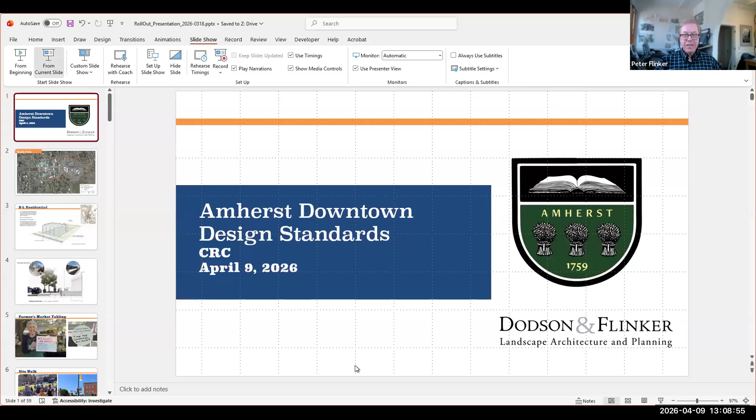Good afternoon, everyone. It's great to be here, finally able to present the final draft of some of these ideas for your consideration.

We're going to do a quick overview of the process we went through, then present the three different elements of the design standards. As you probably know, there are currently design review standards from some decades ago that support the work of the Design Review Board jurisdiction, and the outline in blue is the core of the area we're working with, but it was expanded to include some of the logical adjoining blocks.

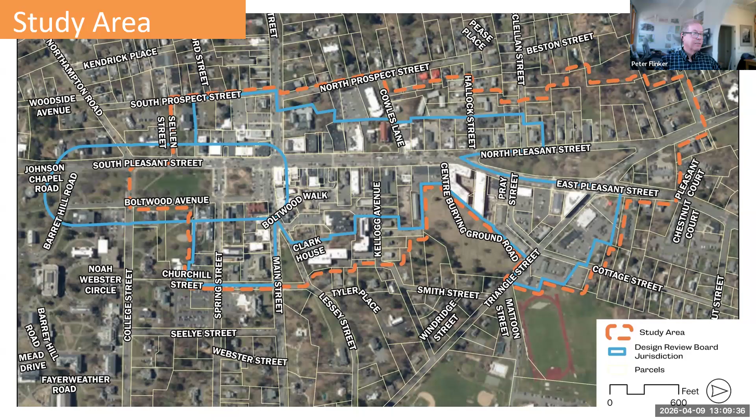Among the things we did was look at the implications of the current zoning for future development. We carefully mapped out how much you could build on each lot and what it might look like.

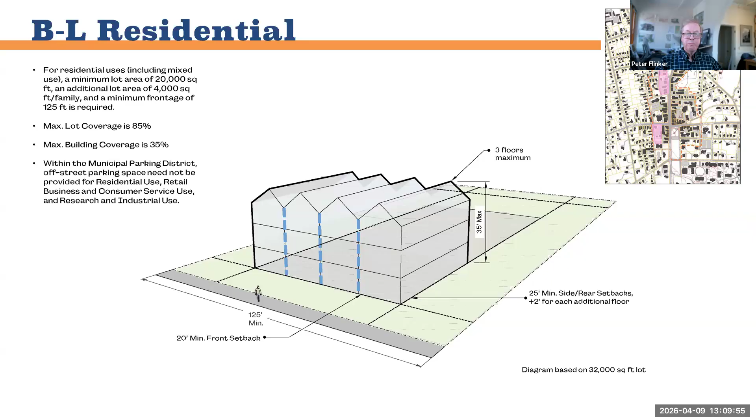We also did measured cross sections and other inventory work on the main street, because part of this project was to look at both the private realm of the private lots adjacent to North Pleasant Street and the other streets, and also the public realm, with a focus on updating the streetscape design standards. So part of that was looking carefully at how the streets, sidewalks, planters, ramps and so on are working now in different areas. What we discovered, spoiler alert, is that there's a lot of diversity, so part of the final recommendations is to simplify and unify the standards throughout the downtown.

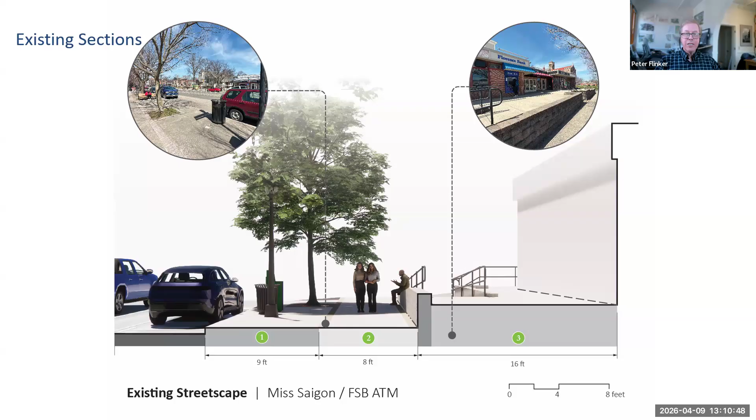We also did a fair amount of public outreach, including field outreach at the farmers market, where we heard from individuals about their vision for downtown Amherst. We also had some public workshops.

We started with a site walk on a beautiful late summer day, walking up and down different blocks, talking about what works and what doesn't work in the downtown. We always find it's really good to start by listening to people's concerns about the place where they live and work. That continued with an evening workshop, focusing again on what works and what doesn't work, what needs to be preserved and what needs perhaps to be changed.

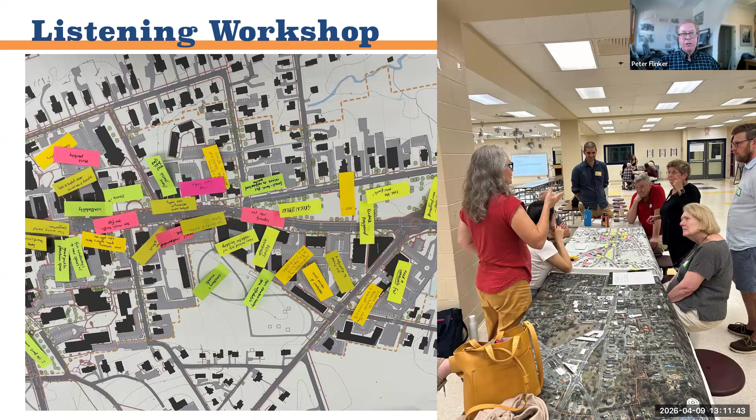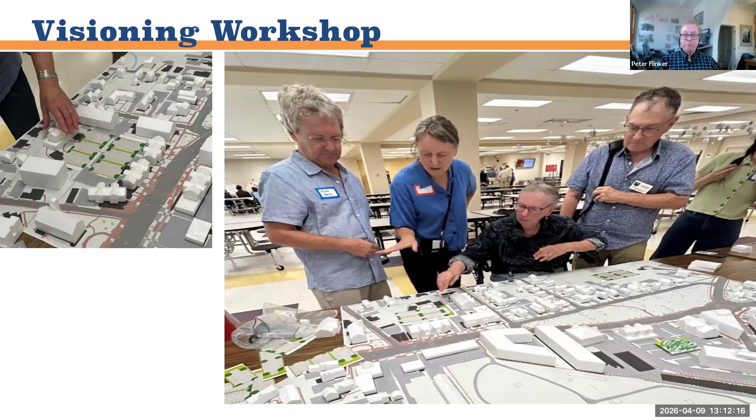That was followed the next day by a visioning workshop, where we brought a big model of the core areas of downtown and let people manipulate buildings to experiment with what would happen if you fill in some of the gaps along the street, some of the parking lots, with new buildings that could bring more continuous activity to the street. Then what would be the implications for parking? Where would you put the parking? How would you get around downtown? We found that was really helpful as we moved forward.

We did a so-called visual preference survey, basically asking people to look at photographs and comment on whether they thought this was a good fit for downtown Amherst or not. We had 377 responses to the survey about building design and 252 responses for design of streetscapes.

Based on this, we tried to distill some of the principles behind what people like and don't like in the downtown.

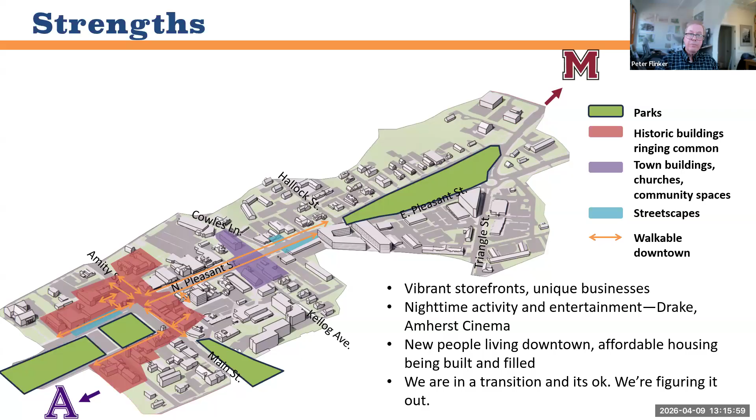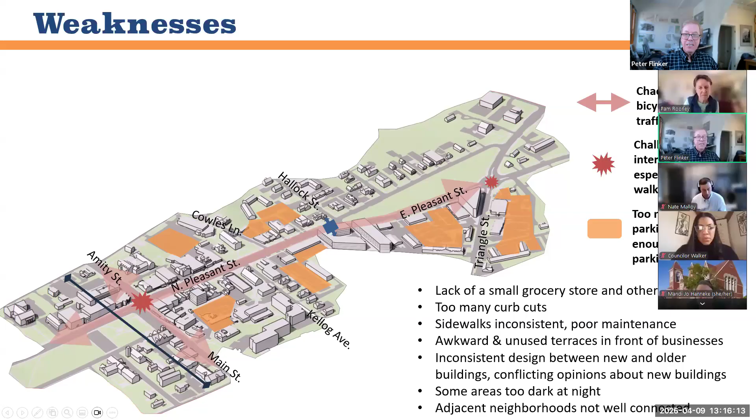Next one. Some of the weaknesses: empty spaces that are filled with cars in many cases. People realize they need parking and want it nearby, but nobody wants to look at it. Some people pointed out that the North Pleasant Street corridor is kind of chaotic, particularly on a bicycle—a lot of traffic, not very wide, and there's a lot going on. There are challenging intersections, especially for people walking and biking. People also pointed out the lack of a grocery store, the lack of consistency in the streetscape, perhaps too many curb cuts, awkward and unused terraces in front of businesses, and inconsistency between newer and older buildings. And some areas are too dark, and the adjacent neighborhoods are not necessarily well connected.

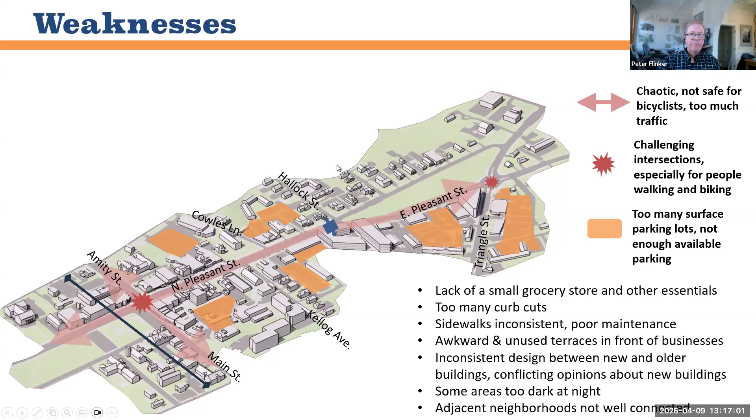Next slide. Some of the opportunities are really focused on taking some of those empty parking lot spaces and some of the less historic buildings and finding opportunities to create more places for people to live and work, to improve the functionality of the parking and have better outdoor spaces. And then, along North Pleasant Street, to create more room for pedestrians and bicyclists.

That said, our recommendations really focus on the design of the sidewalk space between the curb and the buildings. We did not address the design of the street itself, so we're not going to talk about on-street parking or bike lanes, and we didn't have any real recommendations for that as part of our concluding report.

Just to jump in here, the reason for that is because when you get into designing the street, it's a more complicated engineering process that was basically beyond the scope of the project. If you want to talk about bike lanes, especially ones that might be grade-separated at the level of a sidewalk, you might get into moving curbs and drainage, and it quickly becomes a very complicated process. So we focused on the space between the existing curbs and the front of the buildings for the public realm design.

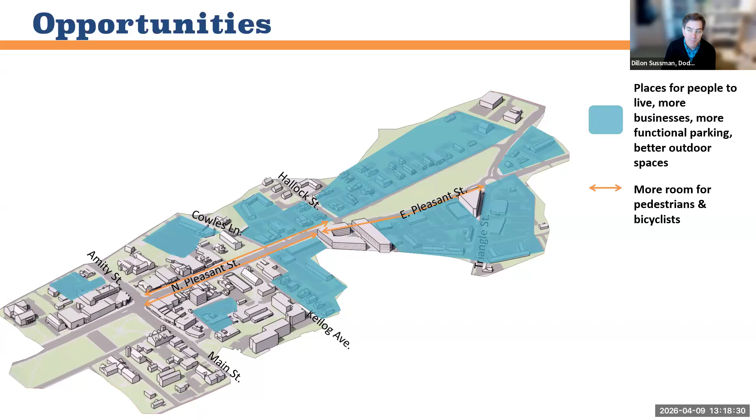And then a lot of the project's focus was on the existing and future character of downtown Amherst. The current guidelines and zoning say, essentially, when you're building a new building, make it fit into the context of what's around it. What we discovered is that there are many contexts in terms of design in downtown Amherst, from the historic center around the Common to contemporary buildings in the North End, and pretty much everything you can imagine in between. So, next slide please.

This led to some diagrams really showing how that works. We have a solid traditional area in the lower left around the Common. In the north, a very modern block between East Pleasant Street and Triangle Street. A cozy residential block on the west side of Kendrick Park. And in between, a mix of funky, mixed retail commercial area, and something we call the Hinge, which is the space where the churches and the post office create literally a hinge between the historic downtown and the northern end of the downtown.

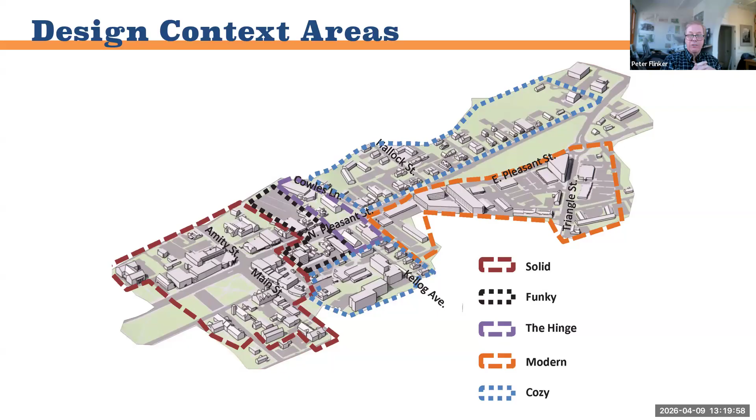This became the basis of how we're shaping the guidelines, so it was carried forth into what we're calling character zones. Again, the lower left is the downtown traditional Main Street area, which is the historic core surrounding the Common.

What we're calling the downtown village, in purple, is a transitional scale between the larger buildings in the core and the more residential blocks around it. Then what we call the downtown modern Main Street, which is the block between East Pleasant Street and Triangle Street, has the newer contemporary buildings but has really been in transition since after World War II.

It was a lot of automobile-related uses ever since that time, and now is becoming something else again. Finally, the downtown neighborhood, in green, are these less dense blocks west of Kendrick Park and on the outskirts of the other blocks, with a mix of uses but generally more green space. Part of that is because there's some wetlands in the back. There's also large, deep lots where the front is developed and the back is vacant.

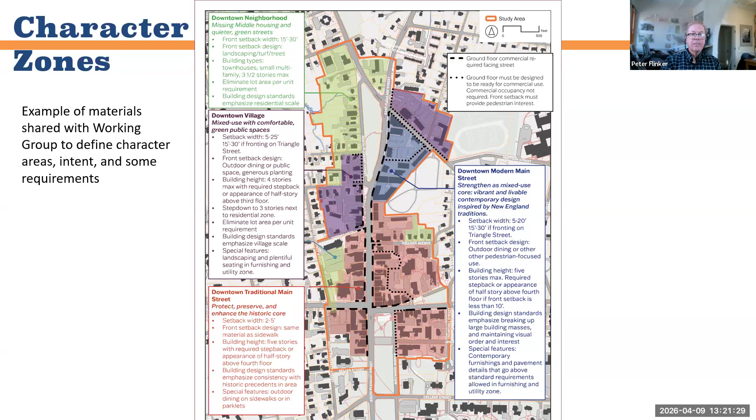We developed the design standards in three volumes. The first is the overall context and vision. The second is the design standards for private development. And the third is design standards for the public realm.

We wanted to start with the vision, because what we often find doing design standards is that even with very specific standards for individual elements like building design or tree plantings, it's very hard for people to review development effectively if you don't know what you want. Having a clear vision that's stated develops the principles behind the design standards and gives you a touchstone.

So when someone comes forward with a building and you say, we really want a wide sidewalk in front of this building, and they say they don't want to do that, you can refer to the vision as well as the standards themselves. It's not just that we want a 10-foot sidewalk, but that we want it because we're trying to achieve this vision for our downtown.

So we'll talk about how that's set up within these three volumes. The first includes the existing conditions analysis and then a vision for each of the sub-areas within the downtown. This can be used to guide applicants during the design process, and it can also be used by boards during discretionary reviews, especially the design review board, whose standards are largely about fitting into the context.

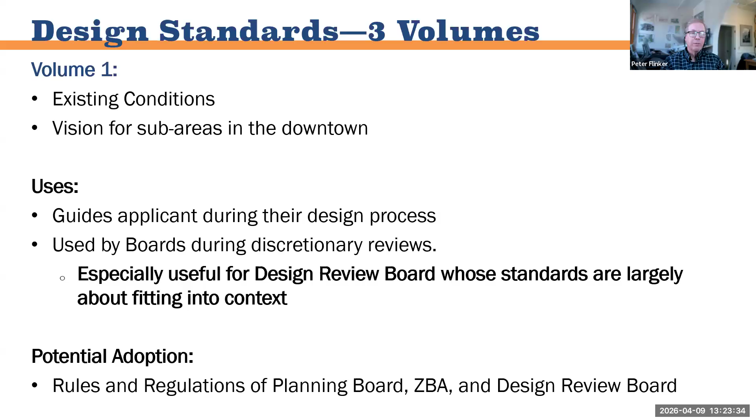So the vision describes what that context is meant to be in the future, and it potentially could be adopted as the rules and regulations of the planning board, the ZBA, and the design review board. Next is volume 2, the design standards for the private lots.

This includes zoning dimensions and use standards, building design standards, sign and lighting standards. It's meant to provide more objective information that can guide applicants during their design process and then be used by the planning board and ZBA during the site plan and special permit review, as well as by the design review board.

It potentially can be adopted. Some parts will need to be adopted into the zoning to bring it in alignment with the vision. Others could be adopted into zoning or the rules and regulations of the planning board and the ZBA, and could be adopted by the design review board. So the first volume is basically here's where we're trying to go. The second volume is meant to be more of a checklist of specific standards for different elements that people can check off, have you done this?

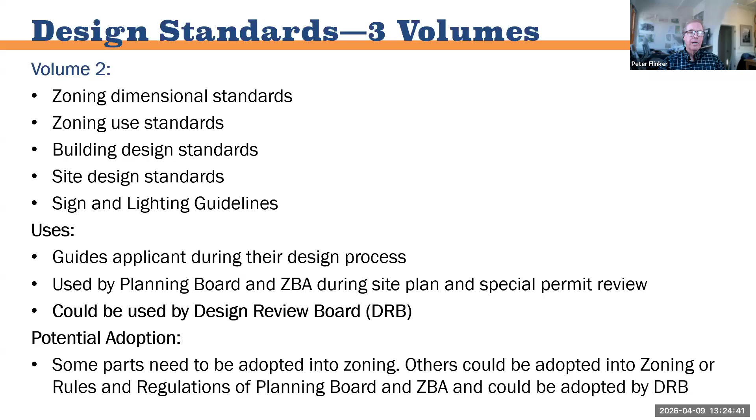Yes or no. Then the third volume is really focused on the public realm—as Dillon said, the design of the space between the front of the buildings and the curb, including sidewalks, street trees, furnishings and so on. It will probably be used most directly by the DPW when making improvements downtown, but also can be applied to development projects digging up that space. It could potentially be adopted by the DPW and or by the town council.

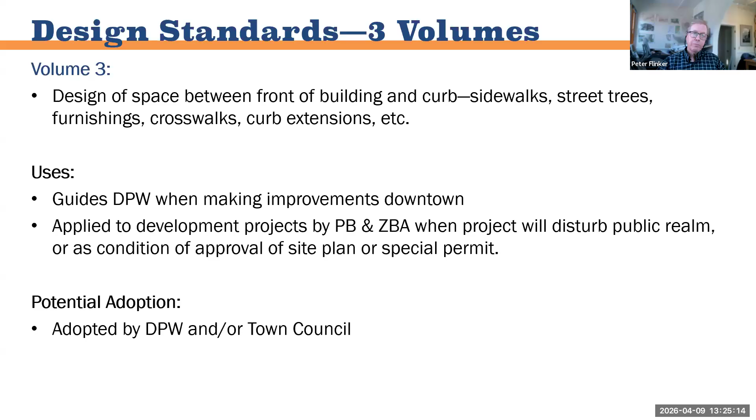So I'm going to talk about the first volume, and then Dillon will review volumes 2 and 3.

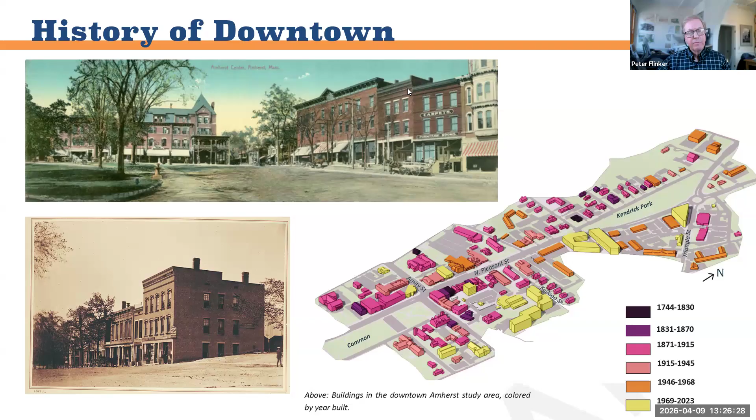We looked at the pattern of development in the private realm, including existing massing and fenestration—how buildings are designed currently downtown and what elements they share, like windows lined up in rows and columns. We looked at the way buildings enclose the space along the street: what are the setbacks, how tall are the buildings, and what does that result in for the experience of the street?

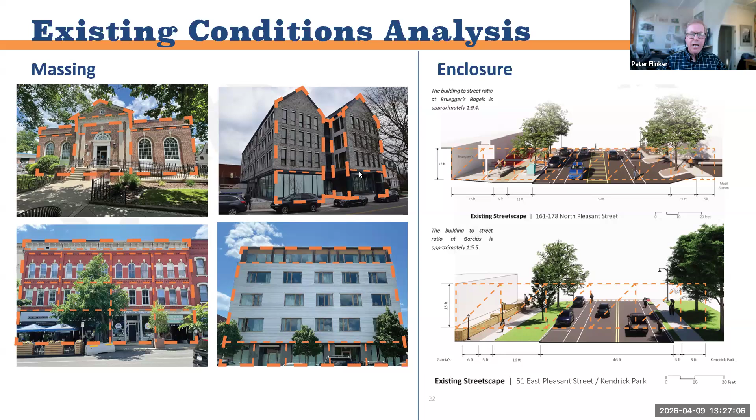Next slide. This is the existing zoning map. Part of this is thinking about how zoning will have to change. Currently there are three existing zones—we're very conscious that a lot of discussion went into the current zoning. But the big picture is a core mixed-use district along North Pleasant Street, with districts of somewhat less density surrounding that to create a transition between the activity on North Pleasant Street and the surrounding neighborhoods. That was a theme throughout all our discussions with the working group and the public, and it's part of our recommendation to continue that pattern.

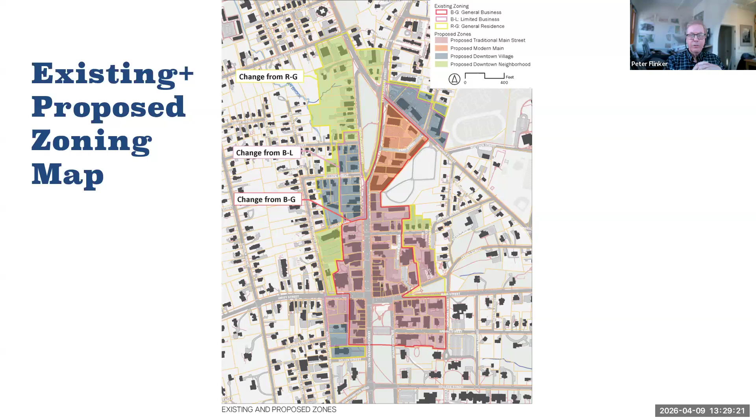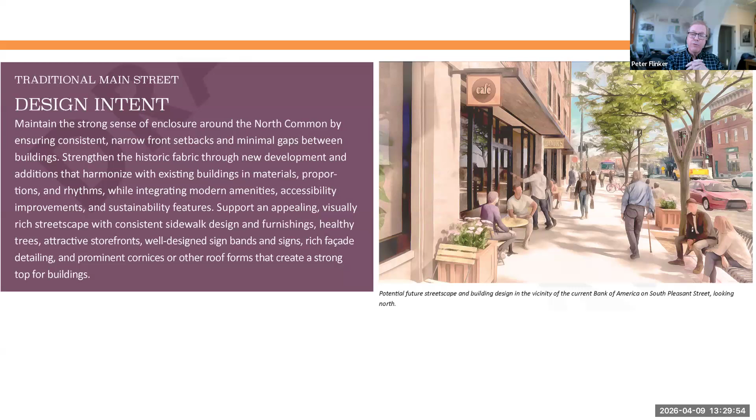But first, I want to talk about the vision for each of the downtown sub-districts. The first is the traditional Main Street district, and the intent there is to continue more of what works very well: buildings close to the sidewalk, a wide, comfortable sidewalk with places to sit, places to eat outdoors, trees and attractive street furnishings, and a lot of transparency on the ground floor. Next slide.

One of the things we did was explore potential redevelopment of some of the blocks in each of these zones. On the upper left is the main corner of Main Street, North Pleasant Street, and Amity Street, with the key building, the Bank of America, as it is now shown in the upper right. And on the lower right is a potential redevelopment under the recommended vision.

So the idea is basically to continue the pattern of the existing 19th century buildings around that corner, to create something more substantial. I won't claim that it's more attractive, but something that really fits the context a little bit better.

Part of that is just doing some simple things elucidated in the design standards, like lining up buildings, or lining up windows and doors in regular rows and columns, to have an open, transparent ground floor that would be good for business and add life and interest to the pedestrian experience.

And then to do some simple things like stepping back the top floor a little bit to prevent the kind of looming facade you sometimes get when a building is right on the sidewalk with 5 stories. One thing to keep in mind is that under the current zoning, you can build a 5-story building right on the sidewalk with no setbacks and no step backs in the upper part.

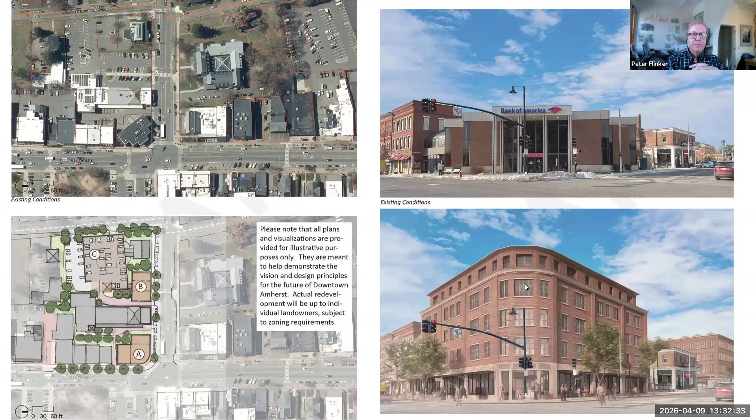This is again the other end of North Pleasant Street, between Kendrick Park and Triangle Street. It's this area we're calling Modern Main. And here the overall massing is basically the same, 4- and 5-story buildings.

But recognizing that this area has been in transition for a long time, it already has some very interesting contemporary architecture, so the idea is to continue that pattern but do it in a way that's perhaps less blocky, with a little bit wider sidewalks, a little bit more setback from the buildings, and buildings that step back on the upper story again to create a little bit more light and space along the streetscape.

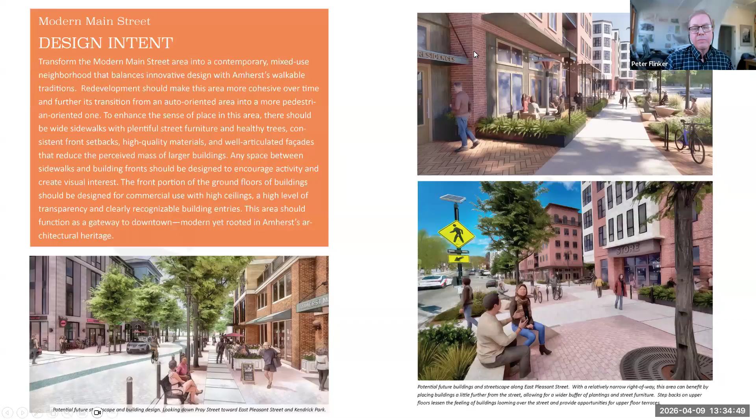Right, so then in between is something we're calling the Downtown Village. That's represented by the lower left there, which is the corner of Cowles Lane and North Pleasant Street. So it's replacing 1- and 2-story buildings with something that might be 3.5 or 4 stories.

But doing it in a way that reflects more of the scale, proportions, and character of the surrounding residential blocks. There's been a lot of interesting experimentation with this in recent years, but it's basically taking residentially scaled components, like a 3.5-story building as you see in that image at the lower left, but then combining those together into a larger structure.

And then some of the precedents include examples which show what the intent is: to combine the buildings and the open space to continue the kind of interesting experience that is in that area right now. A lot of people really love sitting in that sunny side of the street, enjoying a cup of coffee. There's a lot of greenery.

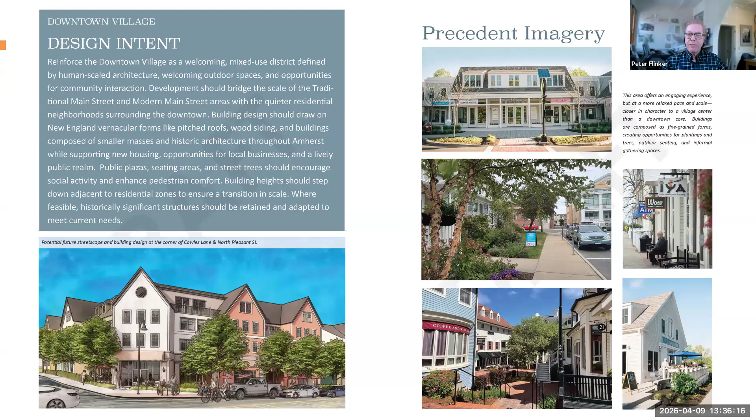So the idea is to allow the buildings to be a little bit bigger, if not hopefully better, but also maintain a lot of that greenery and outdoor space. So the next slide shows again 2 different alternatives for that block between Cowles Lane and Hallock Street.

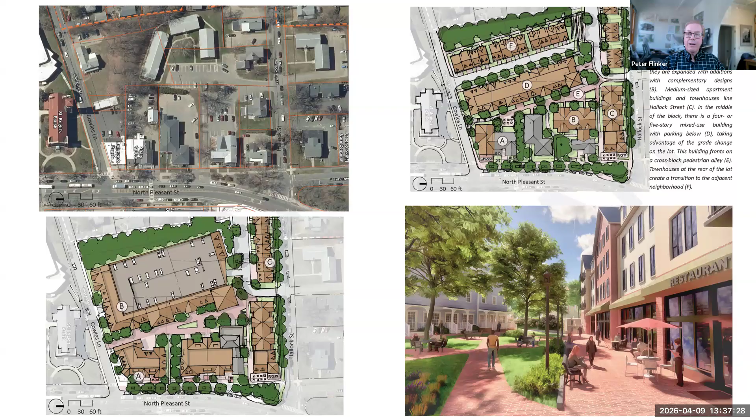The idea is to show that across this range of building types and changes in density, there are some things we want to hold on to, which is buildings that have the massing and roof lines that reflect more of the residential context, and a lot of attention to outdoor space to continue the wonderful interior spaces found in a lot of the blocks downtown, where you can go in between buildings and discover interior spaces, places to sit, because that's part of what makes the downtown interesting and lively.

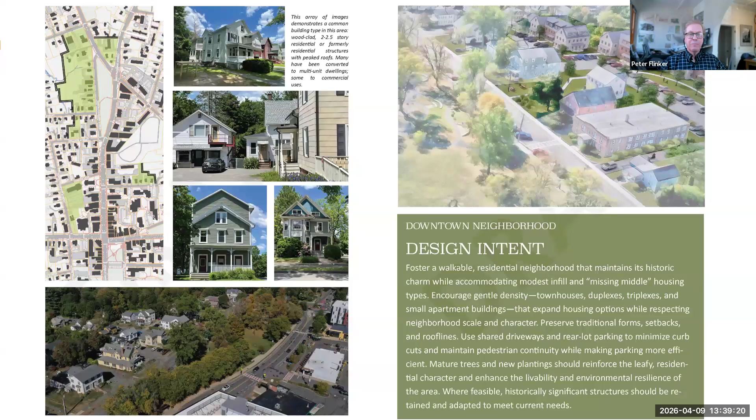Some of the imagery for that is a simulation on the upper right. Again, the idea is to use a residential scale for buildings which may be larger than a single house would be, but they look like several houses that have been connected together and have a lot of the elements that people like: yard spaces to sit, porches, and so on, and great pedestrian connections.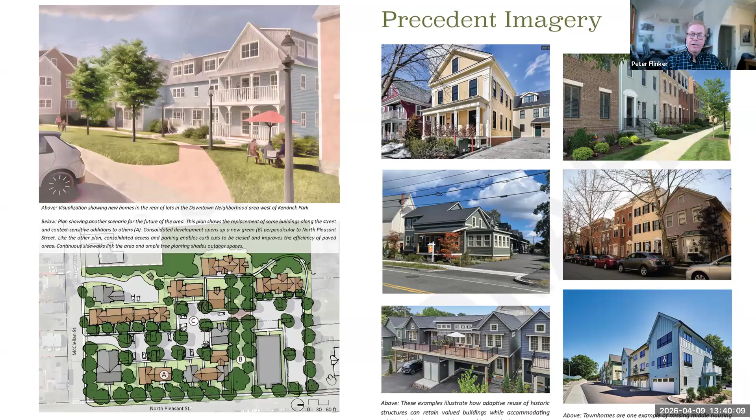Some of the precedent imagery includes infill development of this type, which we know works very well. We've seen a lot of examples of how it can allow a modest increase in density and new homes, but still feel like a pretty quiet residential neighborhood.

All right, I'm going to take over from Peter. I'm Dillon Sussman. I work with Peter Flinker at Dodson and Flinker.

I'm going to talk about the second two volumes. I'll try to move through them quickly so that we have plenty of time for you guys to ask questions and share your thoughts. So, as Peter said, the first volume is about the existing conditions and the vision.

It would primarily be used to guide applicants when they're preparing designs for projects, and then by the design review board with their mandatory advice process.

The second volume is focused on objective standards for private development. So this is more closely aligned with zoning. In fact, we found that zoning in Amherst, as in most places, is one of the primary controls on design. So zoning is a design cookbook. Whether you like the results of it or not, it sets the basic parameters for development, how buildings sit on lots, their basic height and massing.

So there are some changes that we're recommending to the basic zoning because we think they're necessary to get better results for downtown Amherst. In the second volume, slicing and dicing things further, there are 4 different parts to the second volume.

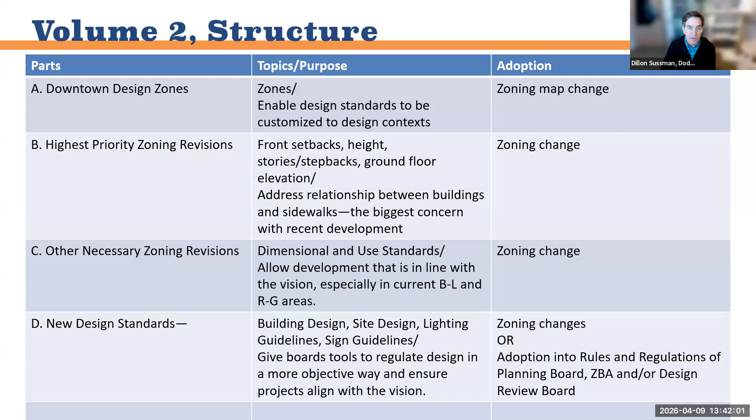So the first part is making those zoning map changes that Peter talked about a little bit before. There's a proposed zoning map in this volume that makes changes to the zone and also adds some features to the zoning map that go beyond what's on there now.

So regulating where there should be ground floor commercial required to be occupied, basically. And then in other areas where it would be acceptable to build spaces that can be occupied by commercial, but not necessarily requiring them to be occupied at this time. So it's a change from the way ground floor commercial is currently regulated in your zoning.

And then establishing areas on the edges of the zoning district where they're butting up against existing residential areas that would be outside of this downtown, and that would apply transitional regulations about height to provide some relief for adjacent properties.

So these zoning district map changes are necessary because we think it's important to separate out the traditional Main Street around the Common and on North Pleasant Street from that modern Main Street area, because we think it's important to establish different dimensional standards there.

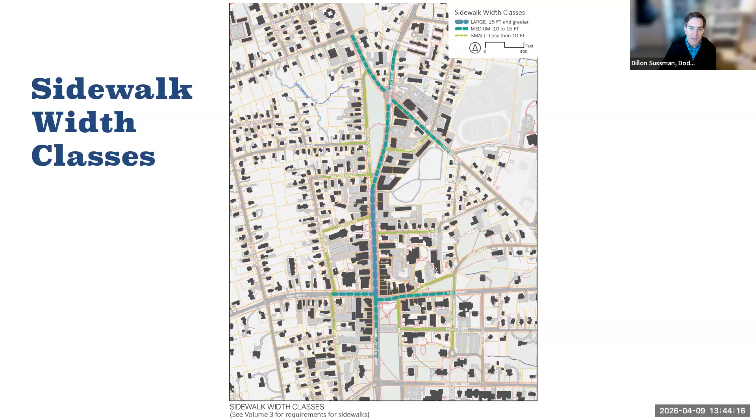Part of this includes sidewalk width classes, so I can talk about that a little bit more later. I'm just going to show some examples of what this looks like.

We encourage you to look at it, read through it, and as Nate said, submit some comments to the town website using the form that's available there. Or if you have a lot of comments, there's an Excel sheet you can download and make comments through that.

It is really, really useful for us to get comments that are specific to a page, specific text, and specific recommended changes, and that we get it in an organized fashion so that we can compare different comments from different people.

So an example of a change that's recommended would require a change to the existing zoning. It's to change the front setbacks, adding a little bit of a front setback in the traditional Main Street, a little bit more in the modern Main Street area, and a bit more than that in the downtown neighborhood.

And establishing maximum front setbacks in all of those areas, with the idea that you want buildings to be within a range, close to the sidewalk, but not too close and not too far as well.

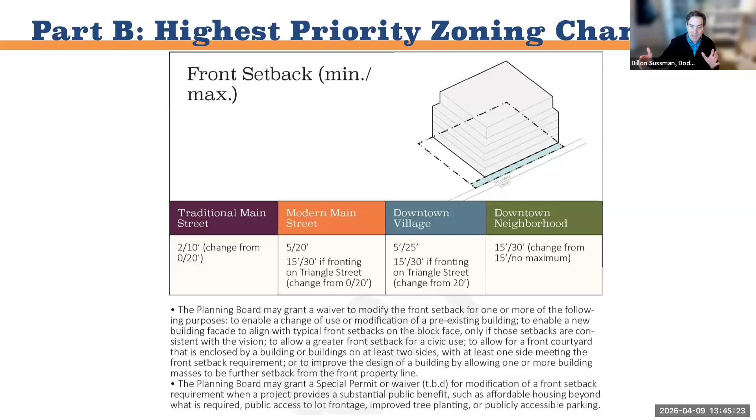There's a recommended change to building height, increasing the building height a little bit in the areas that are currently the BG district, basically to align with the way that buildings are currently built, and to reduce the need for waivers from the planning board.

And then increasing the height in the downtown village to allow, again, buildings that seem like they would be more economically viable. So in every community there's a sort of economic formula at play.

There's an economic formula of how much people paid for properties, and then how much development they need to get out of it to make it worthwhile for them to make changes to those properties.

So if the goal for downtown Amherst is to have more commercial spaces and/or higher quality commercial spaces, or more housing, or more tax revenue, or more places for people to live so they have a place to live and can support businesses by being within walking distance, then if you want any of those changes, you need to make it economically viable for property owners to do that.

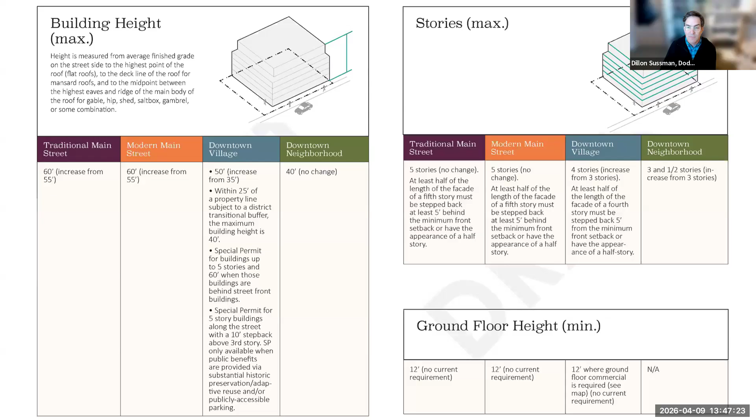All right, so moving on, other recommended zoning changes in this volume are about uses, changes to allowed uses, primarily switching things from special permit to site plan review. What we've heard from developers in Amherst and in every other community we work in is that predictability is very, very important.

So a developer needs to know that if they're going to invest in very costly engineering and architectural plans to produce a permit application, that it's going to result in a project that they can actually implement. It goes beyond that, it also ties into the availability of financing. A developer often needs to be able to line up their financing, and lenders are sometimes not willing to lend to projects that require a discretionary permit.

Other necessary zoning changes, we're recommending a change to the mixed use requirements, basically changing how the formula works so that it's based on a percentage within a certain depth of the sidewalk, really focusing on the area where ground floor commercial is most important, which is that area where you can see into a store, where it's bringing street life, bringing people to the street and making the place look interesting.

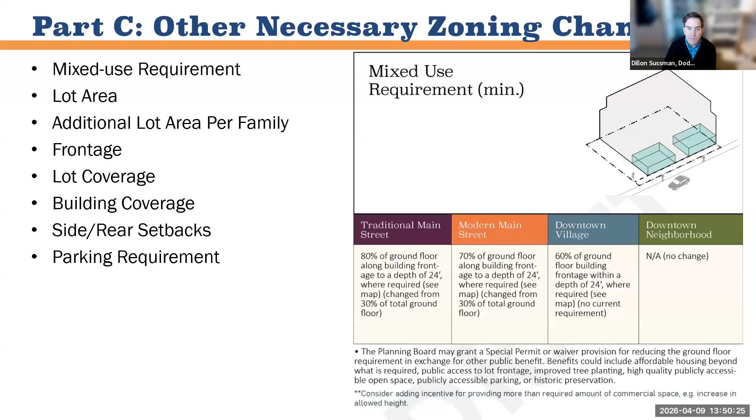The new design standards cover many aspects of building design based on feedback we heard from the public, and also looking very closely at the existing conditions and trying to figure out what it is that's making those buildings that people like in downtown Amherst. What are the key characteristics of them, so that the planning board or the design review board has objective standards by which to review projects.

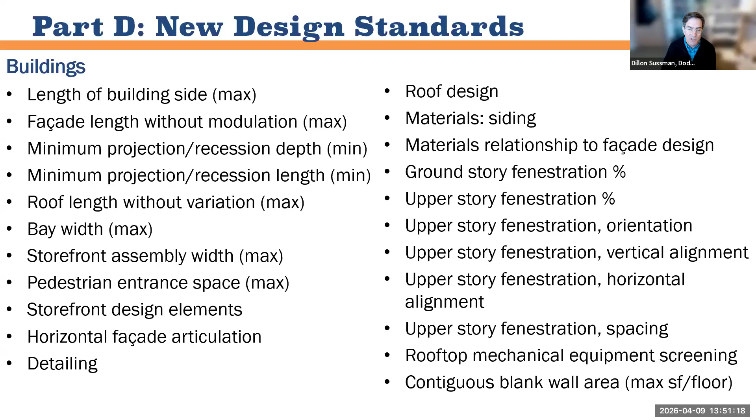And so they can say, yes, this meets the standards, or no, this doesn't meet the standards. Everybody can know what is expected from the beginning, which includes the applicants as well as residents of Amherst and abutters. So this is a general approach, trying to make things as objective as possible, as predictable as possible.

Some examples of that: there's a standard for the maximum length of a building side. Then within that, if a building is over a certain length, the facade is required to either step forward or step back, so there's variation along the street. And then within that, breaking up the facade into recognizable bays, which is a very common characteristic of those 19th century buildings along the North Common in Amherst.

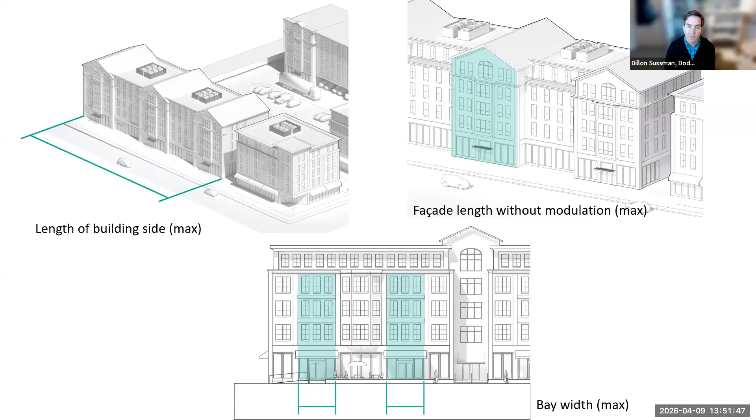There's standards for storefront design, customized to the different areas of the downtown. And then standards for things like how to deal with grade changes along the front of a property, retaining walls, new curb cuts, surface parking, landscaping and plant types, etc.

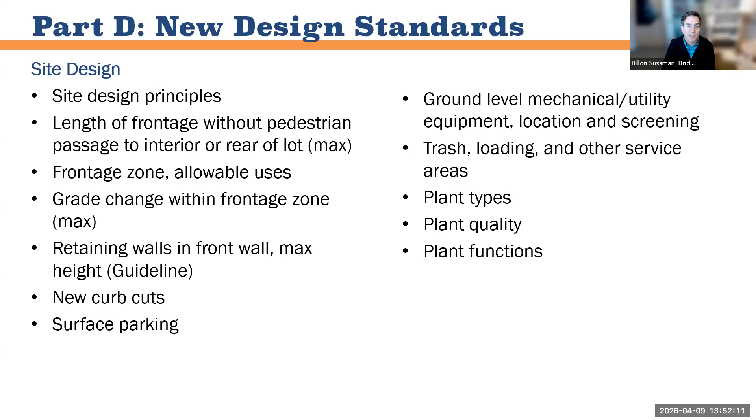In addition, there are some guidelines for lighting and signage, which are topics already covered by your zoning. In this case, these are not objective standards, they're guidelines to try to get clearer about what's intended.

The third volume is about the public realm. These would, as Peter said earlier, be used by the DPW to try and standardize things. A lot of them are based on the current practices of the DPW, but writing them down so that they continue to be implemented consistently. And then there are other topics that the DPW doesn't have a consistent current practice, so this establishes requirements for those.

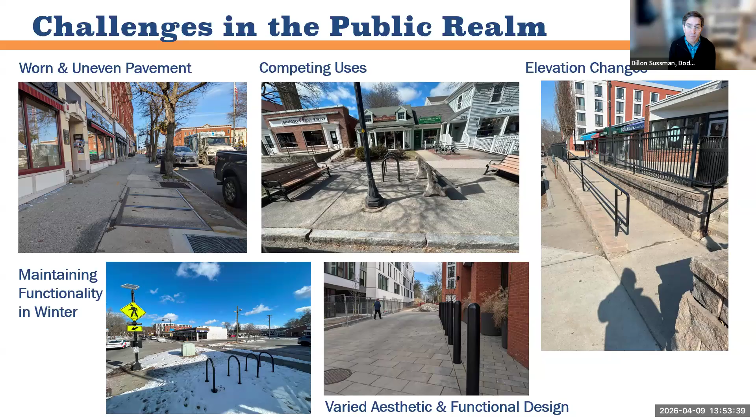So what we noticed in the downtown is that it's pretty diverse, and that's the result of kind of incremental testing and experimentation by your DPW, responding to what they hear from the public, from what I understand, and also responding to what they see about how different designs work over time — how concrete ages, how different scoring patterns crack, how concrete spalls, etc. So the design standards try and deal with those different challenges of inconsistency, elevation changes, competing uses, etc.

They cover most aspects of the space between the sidewalk and the front of the building, pretty much everything we can think of.

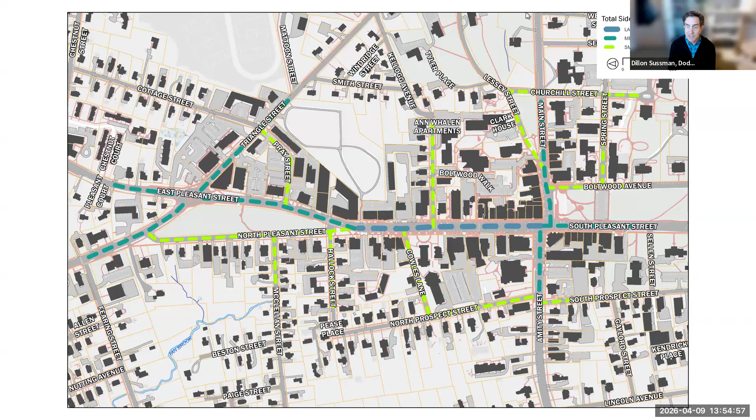As I said before, there are these different sidewalk width areas that are called out. Our general approach is that Amherst probably is not going to do a wholesale redesign and rebuild of downtown anytime soon. So change to the streetscape will be incremental, through a combination of small town projects over time as well as any improvements associated with redevelopment. We're working within the existing framework of the curbs and the idea of incremental change. So we looked at the space between the curb and the front of the building throughout downtown and came up with three different types of widths: a large sidewalk of 15 feet or greater, a medium sidewalk of 10 to 15 feet, and a small sidewalk of less than 10 feet.

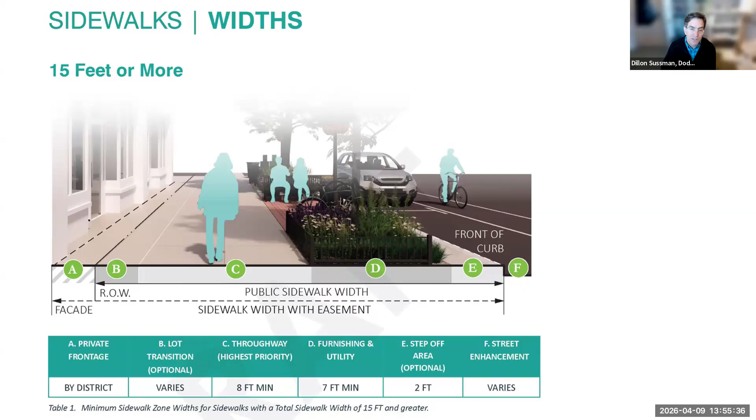Based on that, we set requirements for the parts of the sidewalk: the part you walk on, which we call the throughway, and the space between where you walk and the curb, which is the furnishing utility zone — the location where trees are planted, benches go, bike racks typically go, trash cans go. And then a few extra areas that are sometimes there and sometimes not. Each of these has a minimum width, and also standards for materials and construction.

So examples of what the medium and the small sidewalks look like. You can see that the constituent parts get smaller, but in the medium and the large sidewalks, the basic palette of materials remains the same, having a concrete throughway with regular scoring, and then concrete unit pavers in the furnishing utility zone.

We had a lot of discussions, a dedicated workshop about streetscape, got feedback from the survey, etc. We had a lot of conversations about what these materials should be. Generally what we heard is they want a concrete place to walk, and they want some distinction for the area for sitting. The proposal continues those concrete unit pavers, which you have in some places in downtown — trying to manage that transition over time, since it's going to happen incrementally.

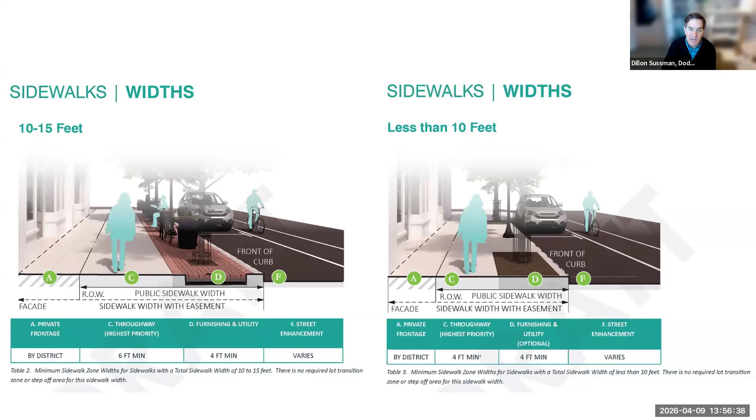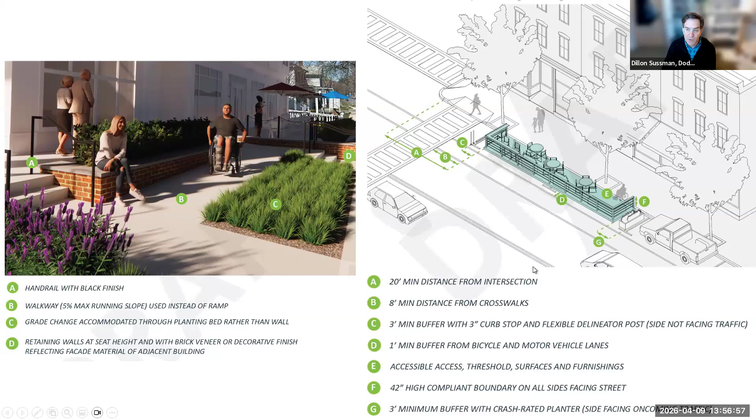As I said before, there are specifications for the materials and construction for those. There's a section that deals with elevation changes, standards for things like parklets, which are temporary uses of parking spaces for on-street dining, and a lot of attention paid to street trees and how to plant trees so that they survive to maturity.

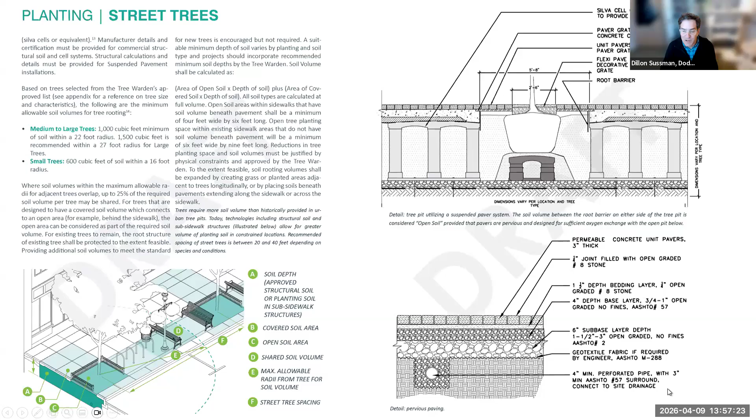I'm going to stop there. There are a lot of other standards in volumes 2 and 3 that I didn't cover, so again, I encourage you to look at those and think about what they would mean for the future and give us feedback.

Thank you very much — every time I listen to your presentation, I pick up some additional information, so I appreciate it. Hopefully we don't contradict ourselves from one to the next. I need to note that Jennifer Taub joined us at 1:10, so that's for the record.

While we have Peter Flinker and Dillon Sussman with us, and Nate, are there any questions from any of the CRC members?

Mandy: I want to thank Dillon and Peter for coming and giving that presentation. I started delving into this yesterday, and I will be filling out the Excel sheet. But as the presentation went forward, I had a couple of overarching questions that stood out to me, and I'm hoping you can give me your thoughts on those.

The first one is, if this is really design guidelines, design standards, and we're putting them into the zoning, is it logical, is it necessary — is a design review board actually still needed at that point if we adopt all of this into our zoning?

A lot of what I've read about creating more housing opportunities and making things less cumbersome to buy is that every review you add adds costs, and if you're trying to make things more affordable, you don't want to add more reviews. So if you've already put all the design standards into the zoning code, do you actually need a design review board when another board is already looking at that design? That's one of my first questions, and I have four of these.

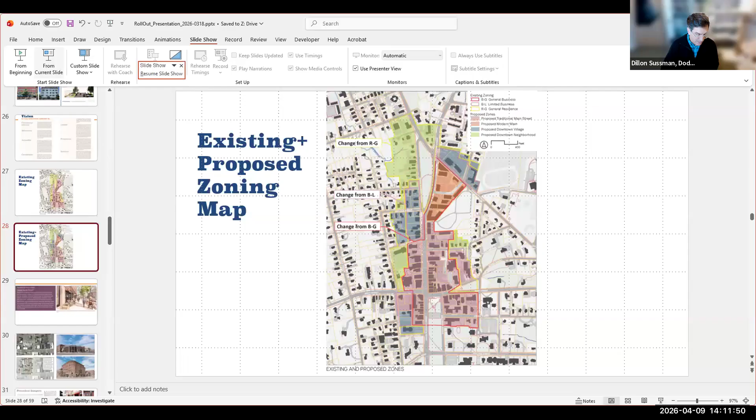So these areas shown in green here, which is the west side of Kendrick Park, from McClellan Street to Fearing Street, basically mostly one parcel deep, but in a few cases there are 2 parcels that are used as one, is proposed to be split off from the RG and rezoned to a new zone called Downtown Neighborhood, which could have most of the standards for the RG now, but with a few changes.

The triangle between East Pleasant Street and... what does that become there? Triangle Street? It's not Triangle Street, it becomes North... Pleasant is Triangle again. So that triangle, and then St. Bridget's Parish Hall, and North Prospect Street from Coles Lane to Amity Street, the green area here, and then a bit of Cottage Street up to Kellogg Avenue. Those areas are all proposed to be rezoned to a new zone called Downtown Neighborhood.

There are dimensional changes to those and some use changes proposed for those. Yeah, so I don't want to get too in the weeds, but we discussed this at the open house. So that northern part by Kendrick Park, that would take some of the RG for the Downtown Neighborhood zone.

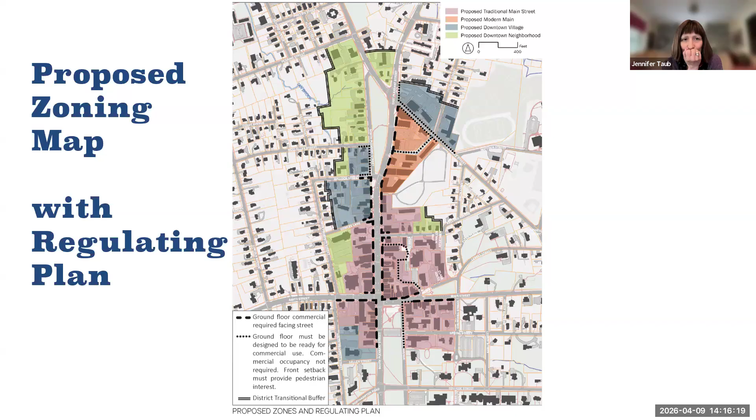I guess I'm impressed that you're not trying to do one size fits all on the downtown, and I like the four different districts. I like that there's a respect for the funkiness of the downtown and the variety we have, while at the same time trying to have a little more coherence and a little more density as our master plan calls for.

So my understanding is that these would be new zoning categories for the downtown area, and we're not changing anything for other parts of town. So it's just renaming the downtown zone so they have their own zones.

So that's great. You talked about design review boards, and a little bit about whether we need them, or how, if you're entering design standards into the zoning, do you need the design review boards? Do you have any examples of other places that have done this kind of zoning, and do they retain their design review boards, or get rid of them, or is it sort of all over the map?

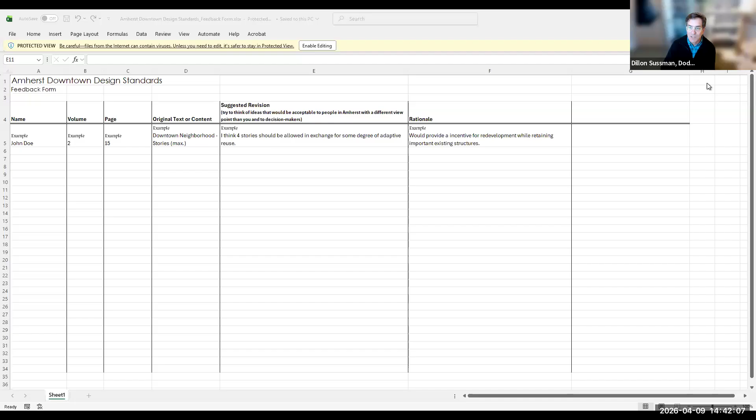We're looking for the volume, the page, what it says now, and your suggested revisions. And then really importantly, the rationale of why this is a good idea. On the suggested revisions, it says try to think of ideas that would be acceptable to people in Amherst with a different viewpoint than you and to decision makers. So the goal is to understand not just what the change is that you're suggesting, but why.

Pam was talking about needing a bigger setback because she's concerned about overshadowing neighbors - that's really important. But also coming up with decisions that will work for people with different viewpoints, because we've seen that people in Amherst have diverse viewpoints. You're wrestling with real challenges related to housing, the role of students in your housing market, the value of new development versus historic preservation, and what this downtown should be. These are real weighty policy discussions. So trying to figure out a balanced approach for the future that enables Amherst to move forward is really important, and not getting caught in 'we can't all agree, so we shouldn't move forward.'

I also want to respond to Pam's question of who decides. You said if there's different viewpoints and there's no consensus, then who decides? I think that's an important question for your town council.

Ultimately, I don't think that was actually my question, but okay - the point was that you might get Mandy Jo's comment and you might get Pam's comment, and they would be diametrically opposed, which is not unlikely. So in that mix, how do you say, okay, who do we pick if we're going to make any adjustments and tweaks here?